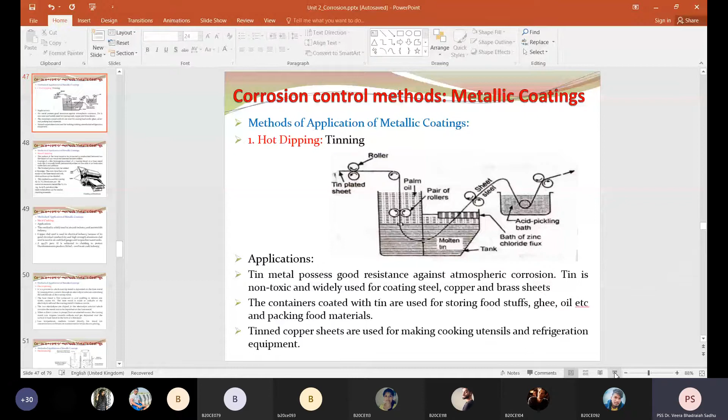So we were discussing some corrosion control methods. One type is metallic coating. We were discussing hot dipping. There are two types of hot dipping: one is galvanizing, another one is tinning. We discussed those in the last class. So now we discuss metal cladding.

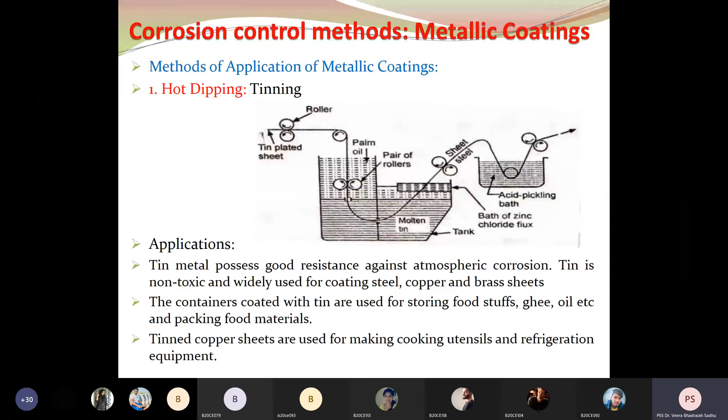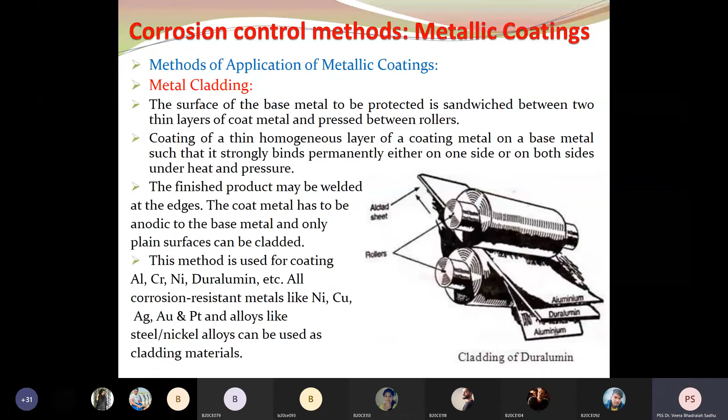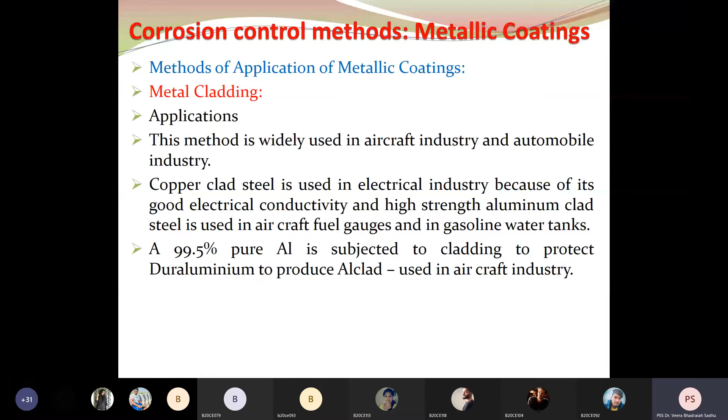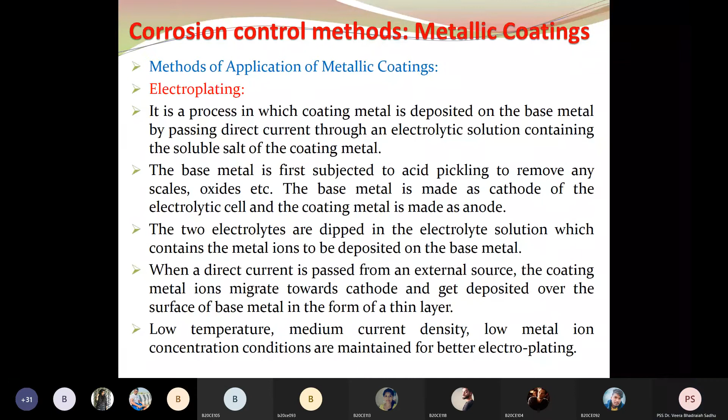Okay, so this is about electroplating. So what are the objectives of electroplating? To increase the resistance to corrosion, chemical attack, and wear of the plated metal. That is the primary objective. And to improve the physical appearance. After electroplating, your appearance will be different, and you can also have more hardness.

Since you are coating a different metal on the surface of your base metal, the hardness will change. Depending upon the metal you use, the hardness will be increased. And to increase the decorative and commercial values of the metals, and to increase the strength of non-metals like plastics, wood, and glass.

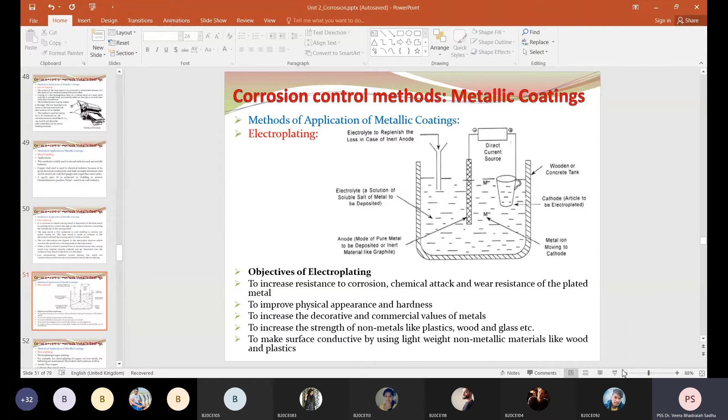Sir, your voice is breaking. It is not clear, sir. Okay, I think I have 100% volume. Maybe some network issues. I'm using maximum volume. It's exactly like the exam forms yesterday evening. Some people could submit the forms without any difficulties; some people spent 2 hours to submit the form. Okay, is it clear now? No, sir, still issues. Some people may not have the issues; it depends upon the network quality. Everyone has the same issue, sir. The voice is not clear.

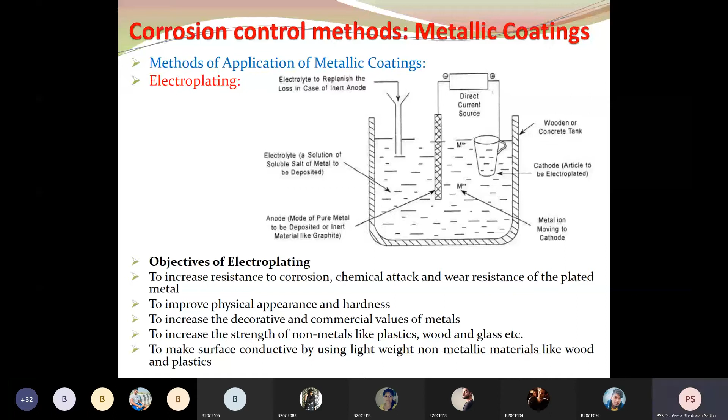So the objectives of electroplating include non-metals also, like plastics, wood, and glass, and to make a surface conductive by using lightweight non-metallic materials. Okay, so this is also under objectives. We can take one example of electroplating on the base metal. How can you coat copper through electroplating? Take copper on an iron article: for example, if you want to coat copper on top of iron.

What are the requirements? You take copper sulfate as the electrolytic bath solution, pure copper as the anode, and your base iron metal article as the cathode. You need a moderate temperature, which is 20 to 40 degrees, and a medium current density of 20 to 30 milliamperes.

So when the direct current is passed through this electrolytic solution, the copper ions migrate towards the cathode, which is your base metal, and at the cathode these copper ions are reduced to copper metal and deposited on the base metal. Okay, so this is one example of coating copper on an iron article through electroplating.

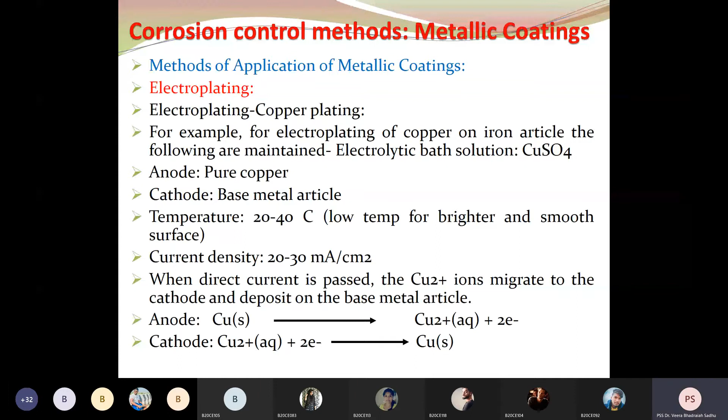So the next method is electroless plating. So what do you mean by electroless plating? Because in electroplating you have to pass current through your electrolytic solution, I mean the electrolytic bath. But here in electroless plating you don't use the current. Okay. So in the previous case you have to use the current, but in this case, electroless plating, you don't use the current. Okay, so that is the main difference.

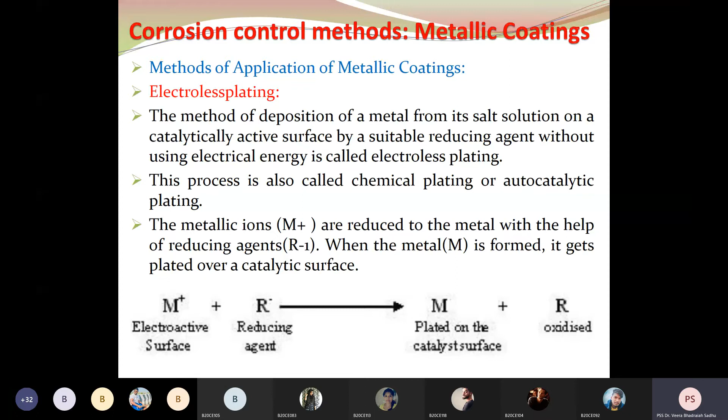Okay, so the process is called chemical plating or autocatalytic plating. The metallic ions are reduced to the metal with the help of a reducing agent, and the metal is formed on the catalytic surface. That means the base metal is catalytically active. So for this process you need to have some pre-treatment of your base metal, and you have to activate the base metal surface by different organic solvents, some acid bath, or alkali. So you have to treat the metallic surface.

The surface of stainless steel is activated by dipping in a hot solution of 50% dilute sulfuric acid. So most metals you clean with dilute sulfuric acid, so that you get rid of the rust and dust on the surface, and you activate the surface. Activation of the surface in the sense that there must be some oxygen bonds, or you create some active sites on the surface, so that when you coat the metal, the metal film is strongly bonded to the surface. You increase the adhesion between your base metal and the metallic film. So you need to activate the surface of your base metal.

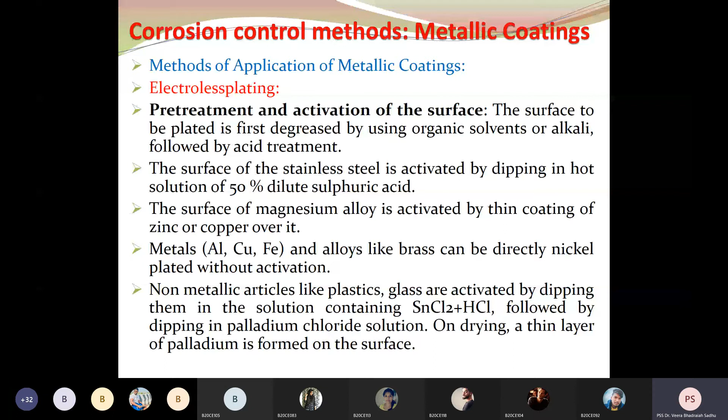So what are the requirements for electroless plating? You need to have soluble electroactive metals in the form of metal chloride or sulfate, because a metal chloride or sulfate means a metal salt. If it is soluble in some electrolytic solvent, you generate metallic ions. The metallic ions migrate to the cathode, get reduced at the cathode, and are deposited on the cathode.

You will require reducing agents like formaldehyde and hypophosphites, and complexing agents like citrate, tartrate and different salts of succinate like sodium succinate, as well as succinates, glycinates, and fluorides. You also need to improve the rate of plating, the rate of metallic film deposition. You also need a buffer solution to maintain the pH of the electrolytic bath.

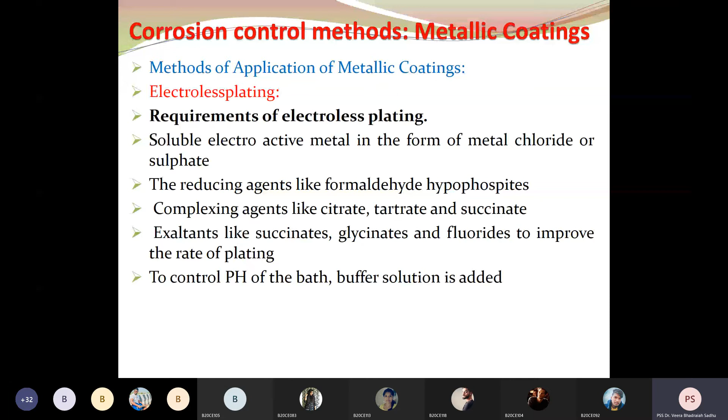Take the example of electroless nickel plating. It is an autocatalytic chemical technique used to deposit a thin layer of nickel-phosphorus or nickel-boron alloy on a solid workpiece such as metal or plastic. You can coat nickel on top of plastic or any type of metal for base metal protection. This process relies on the presence of a reducing agent. It involves pre-treatment and activation of the surface. Activation is always important, because if the surface is active, it's ready to be plated.

So what does the composition bath contain? It contains the coating solution of nickel chloride, the reducing agent sodium hypophosphite, the buffer sodium acetate, and sodium succinate as the complexing agent. The optimum pH for this nickel plating is 4.5, and the optimum temperature is 93 degrees centigrade. These are the optimum conditions to get a proper nickel film. Some scientists might have worked at different conditions, but this is the optimized condition where you get better values.

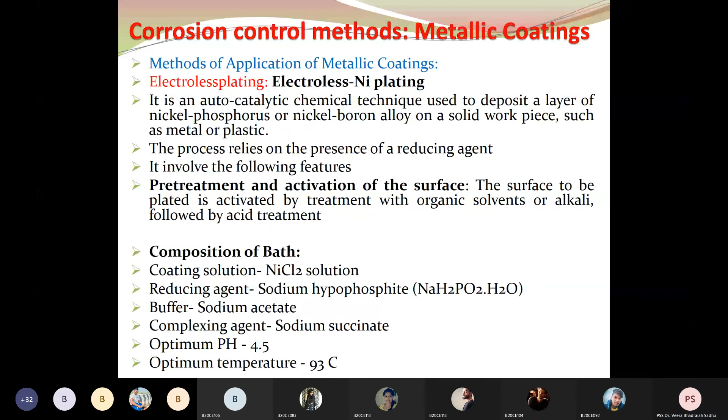What are the advantages of electroless plating? There is no requirement of current or electrical energy. In electroplating you require electrical energy, but in electroless plating you don't. Through this method, even intricate parts can be plated uniformly. Intricate parts means even irregular shapes, for example bolts and nuts, where the surface is not uniform. Still, with this process you coat uniformly on irregular surfaces.

There is flexibility in plating volume and thickness, so you can control the thickness of the film you want to coat. The process can plate recesses and blind holes with stable thickness. Chemical replenishment can be monitored automatically. Matte, semi-bright, and bright finishes can be obtained, so you can easily obtain a polish on the articles. Plating on articles made of insulators like plastics and semiconductors is possible.

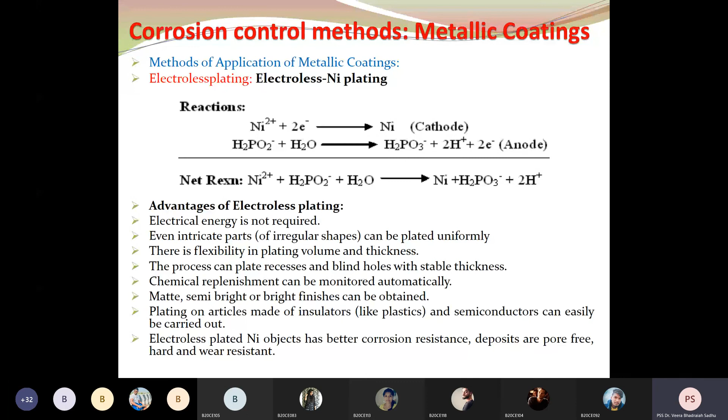What are the applications? It is widely used in electronic appliances, and also for domestic, automotive and jewelry items and the tops of perfume bottles, which you can coat with nickel. Polymers are also used in decorative and functional works. Nickel coated plastic cabinets are used in digital and electronic instruments.

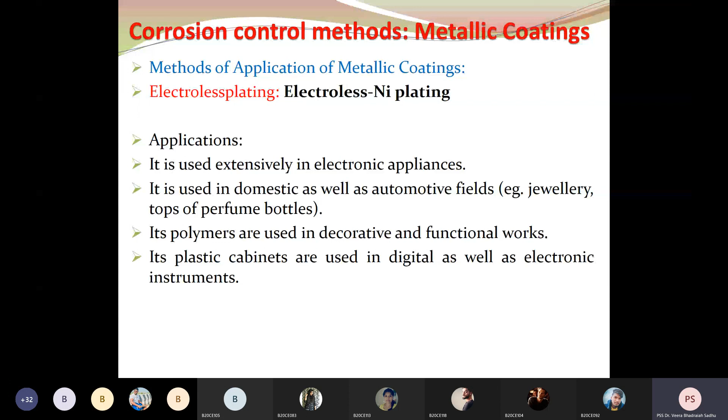So this is all about electroless plating, electroplating, metal cladding and different protection methods of metals against corrosion. This is all about corrosion and its controlling methods.